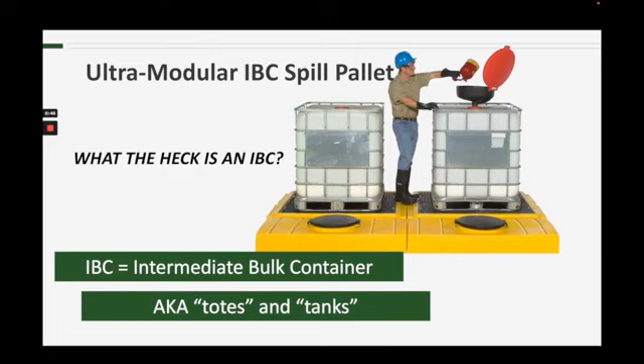Before I get too far, it's probably a good idea for me to answer one question first. What the heck is an IBC? Great question. IBC stands for Intermediate Bulk Container. They're also commonly known as totes or tanks. These are IBCs.

IBCs are used for storage of chemicals similarly to 55-gallon drums, just on a larger scale. So, in order to capture spills from these larger containers, we use multiple components to meet or exceed what is required. That means it will comply with EPA spill containment regulations. There's a link below to a different video that explains the regs in detail.

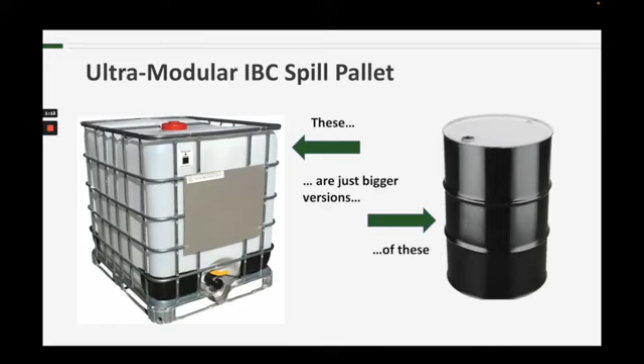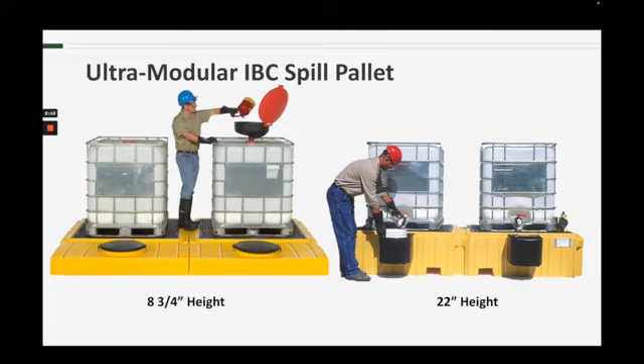If you're familiar with our other IBC spill pallets, you'll very quickly realize that this product is pretty different. Most notably is the height difference. Here we have a 2-tank modular IBC spill pallet on the left and a twin IBC spill pallet on the right. Both are spill pallets designed to hold 2 IBCs, totes, or tanks, but the twin IBC spill pallet is 22 inches high, almost 3 times the height of the modular IBC spill pallet, which is only 8 3/4 inches high.

Which brings us to one of the big advantages that this product has over its counterpart: its low profile. That 8 3/4 inch height makes moving and handling of IBCs easier and safer. And for those applications where access to the tops of the totes or tanks is required, this lower height makes that access much easier and much safer.

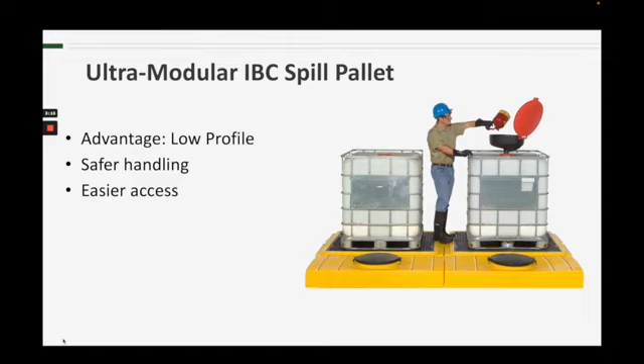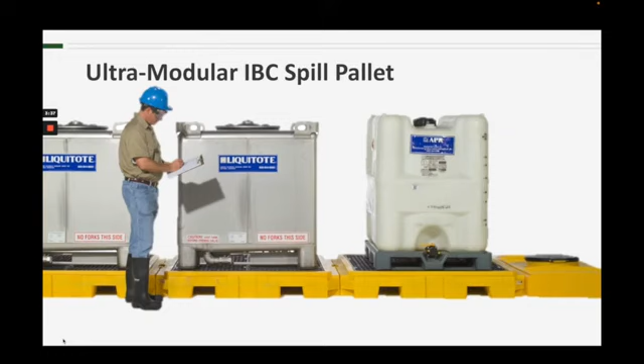I know what you're thinking. How do you meet the containment capacity requirements while reducing the height by so much? If we take a closer look at an illustration of the inside of the system, you can see that the individual pallets are connected to each other via bulkhead fittings.

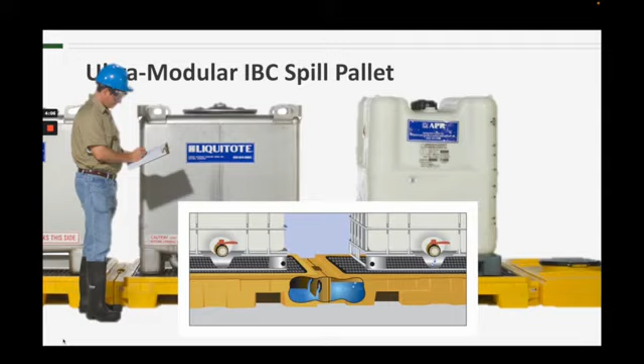These bulkhead fittings serve 2 purposes. One is to physically secure the pallets together. The other is to allow any spilled liquid to travel into adjacent pallets. By doing this, we are allowing the pallets to share containment. This photo shows the actual process of connecting 2 pallets together. These 2 black things are the bulkhead fittings.

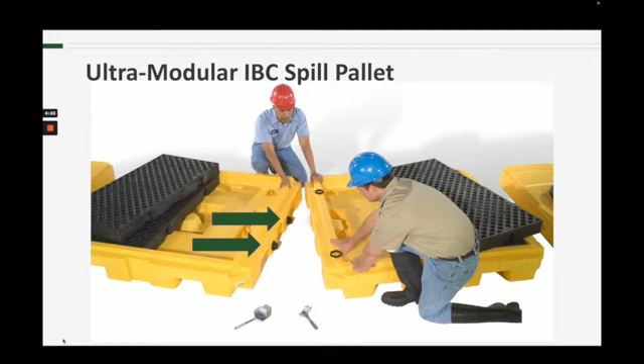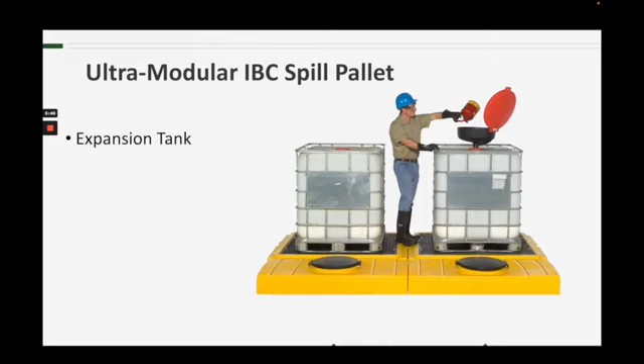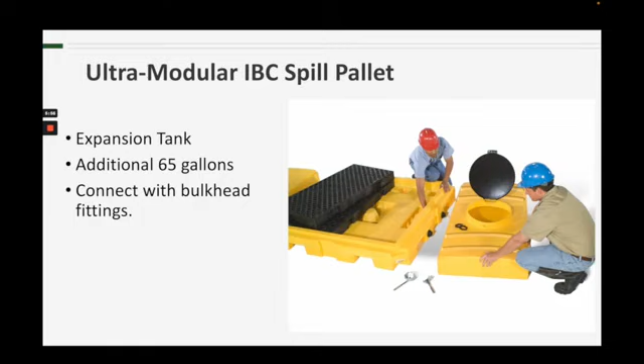But for most of the systems, the 75 gallons of containment for each pallet is not enough to meet the regulation requirements. To meet those numbers, we also have expansion tanks that are connected with the system. Each of these tanks adds 65 more gallons to the system. In this picture, you can see that they attach with bulkhead fittings just like the spill pallets do.

There are 2, 3, 4, and 5 tank models available. Each of these systems is a single part number that includes all of the components, the pallets, the expansion tanks, and bulkhead fittings. Now, it is possible to create a system that's even larger. It would simply require the addition of more pallets and/or expansion tanks depending on the size of the system. This product is modular, so the limits to its size are only constrained by space and budget.

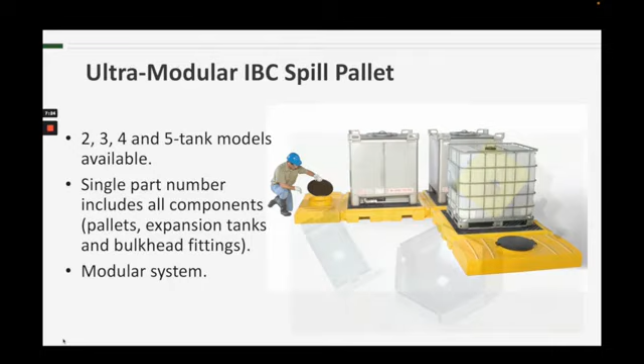There is one other item that will be needed to prepare and assemble the components, and that is the assembly kit. This kit is comprised of 3 components: a 2-piece set that is used to connect and secure the bulkhead fittings together, and a hole saw that will be needed to drill the holes at the appropriate connection points.

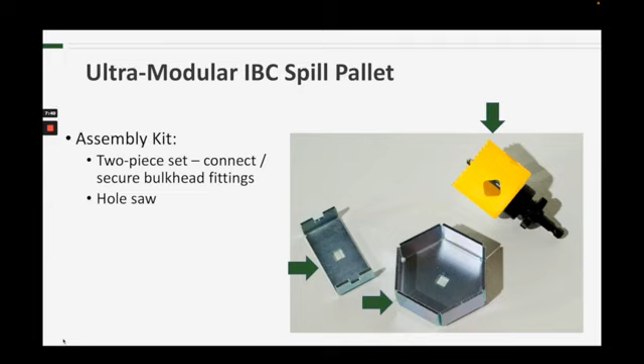So why would you choose the modular IBC spill pallet instead of one of the other IBC spill pallets? The aforementioned low profile is likely to be the reason. Safer handling and easier access to the top of the IBCs are potential deciding factors for spill containment.

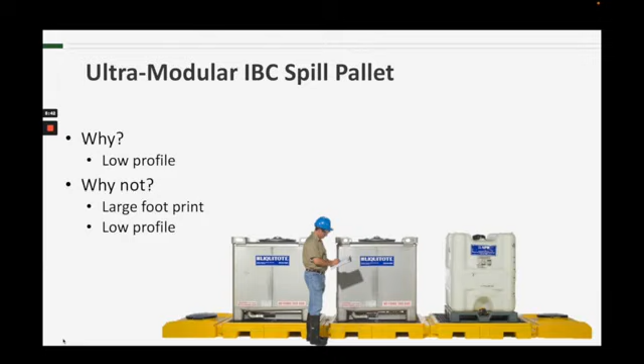Why wouldn't you choose the modular IBC spill pallet? If space is a premium, the significantly larger footprint of these systems could present a problem and rule them out as a possible solution. And what some could see as an advantage with the low profile could be a disadvantage for others. With only an 8 3/4 inch height, it may make it very difficult or even impossible to dispense from the IBCs.

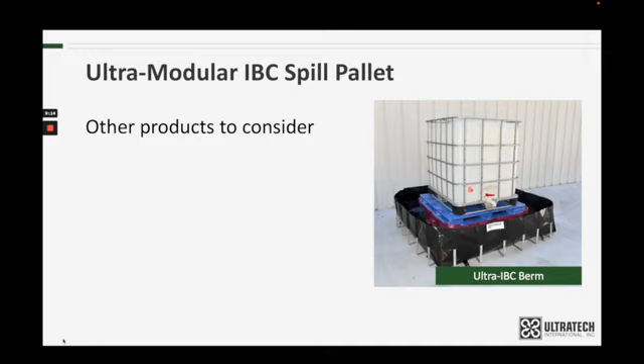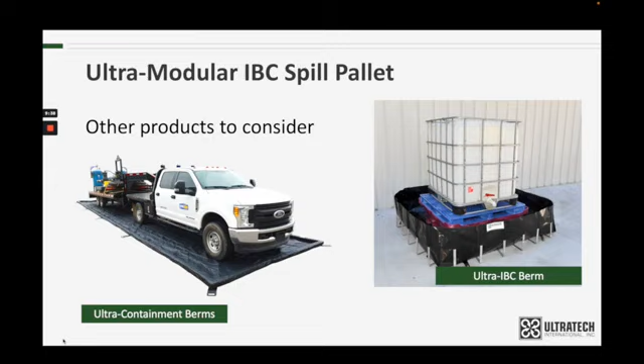Other products to consider? The Ultra IBC berm has an inner spill pallet for IBCs to be placed on and an outer berm to provide enough containment to meet the EPA regulations. This product is designed with a single IBC in mind. If there's a need to contain multiple IBCs, an ultra containment berm could be a great solution. These come in a number of different models with different heights and can be made to just about any size you might need. There are links below to all of these products should you care to look into them further.